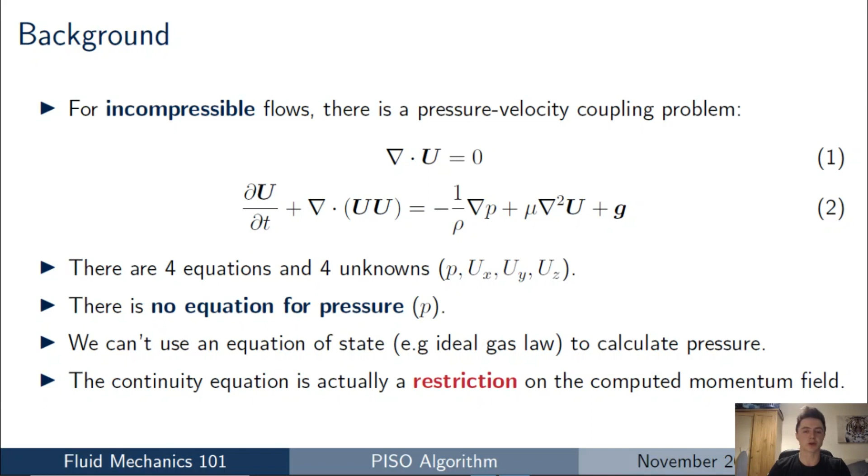And how do we perform this discretization? Well, we do that usually using the finite volume method, and I've got other videos on this channel detailing the finite volume method, or if you want to see things in more detail, you can look at the various courses that I have available, and that will show you how to get that matrix of coefficients M. But generally, when we're thinking of pressure velocity coupling problems, we want to be thinking of things in matrix form, so we've got Mu is equal to minus the pressure gradient there on the right hand side. And so that's a reminder of what those terms mean.

Now, it's also worth remembering that the matrix of coefficients M—all of those coefficients are known, and we calculate those and know what they are, depending on what sort of discretization schemes we use for the convection term, the diffusion term, and so on.

And I've got other videos on this channel about how you discretize the individual terms. But for now, we want to be confident that we're just starting with that general matrix equation, MU is equal to minus the pressure gradient there.

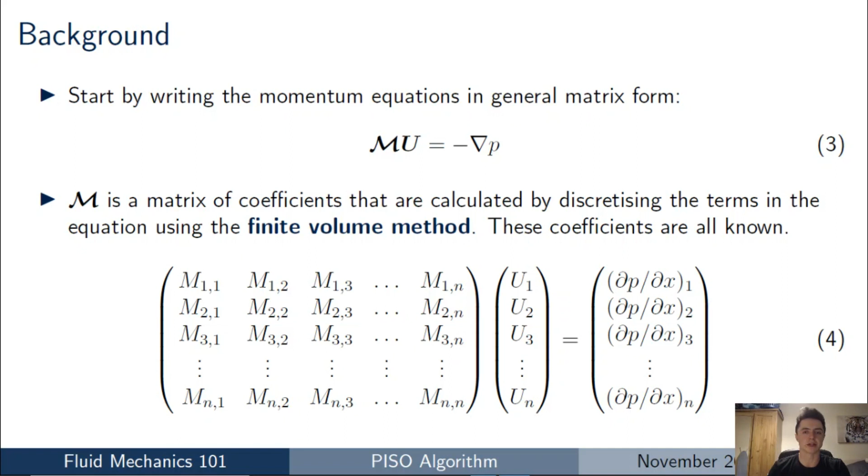Now, at this stage in our pressure velocity coupling problem, what we could do is take the pressure and the pressure gradient from the previous iteration or the initial condition, and then we could just solve that equation directly. So we know the matrix of coefficients m, and we know the source term on the right hand side from our initial guess or previous iteration, and that would allow us to compute a velocity vector, or the momentum field u.

Now, because this is the pressure velocity coupling problem, it's worth noticing that when we solve that momentum equation, the velocity vector u does not satisfy the continuity equation. As a reminder, the vector u, v and w has to satisfy the continuity equation for it to be a valid solution. So at this stage, when we solve the momentum equation, this is often called a momentum predictor in the algorithm. And it's a prediction because we've got a guess for the velocity field, and it doesn't currently satisfy the continuity equation.

Now, a small side note for those of you who use OpenFOAM and like to dive in and actually look at the equations in the source code, you'll often see this momentum predictor stage written as you can see at the bottom of the slide. You're clearly solving a momentum equation, and that's equal to a source term, which is the pressure gradient on the right hand side.

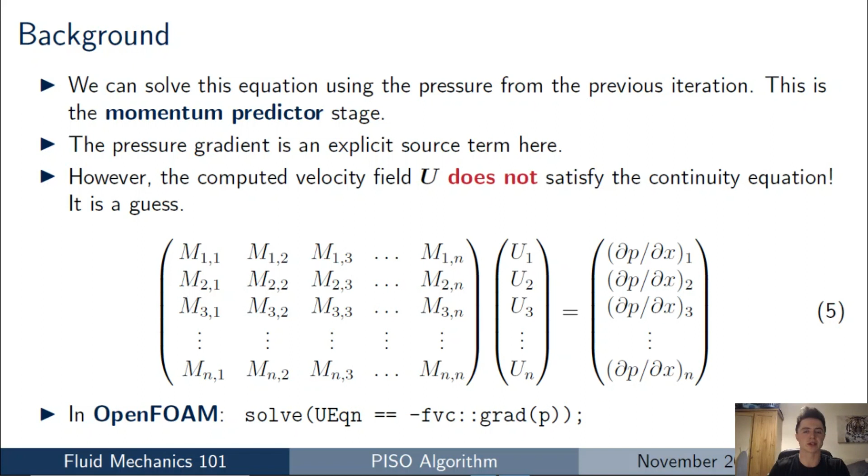Now, when we're analysing and looking at these algorithms, there are a few other extra stages which we need to think about, which will help us when we analyse the system and look at how the pressure velocity coupling algorithms are put together. And the first stage in all of these is, if we think of that matrix of coefficients m,

what we can do is extract the diagonal from that matrix. And the diagonal component of the M matrix is known, and I'm going to use the notation A, the A matrix. You can see it's just extracting those coefficients of the diagonal and using that to make a new matrix. Now, if you follow along with the various sources in the literature, you may see this written as A sub P instead of capital A, which I'm using here. I prefer to use capital A just as a reminder, this is a matrix, just like everything else. Whereas if we used AP, we could confuse that with a value.

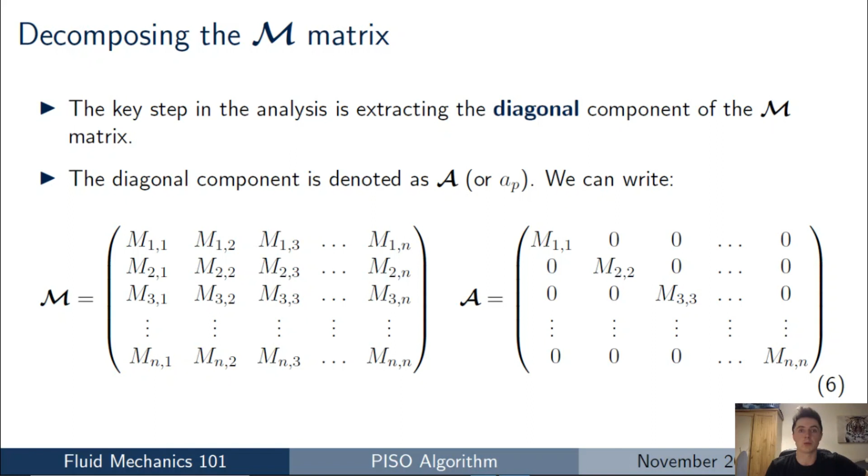So from the M matrix, we can extract the diagonal if we want. And why would we do that? What can we do with this A matrix? Well, the thing to remember is that with a diagonal matrix, it's very easy to compute the inverse of the matrix. And the inverse of a diagonal matrix is just 1 divided by each of the diagonal coefficients, which you can see in equation 7.

And for those of you who follow along the sources in the literature, you will often see this written as 1 over AP. So again, 1 over AP, it's just the same as the inverse of this A matrix, but I prefer to call it the inverse because it's more correct and it reminds us what we're actually doing. And again, if you follow along in OpenFOAM, you'll often see this 1 over AP written as you can see in an extract from the source code, which is sometimes called RUA, which means the reciprocal of the A component from the U equation.

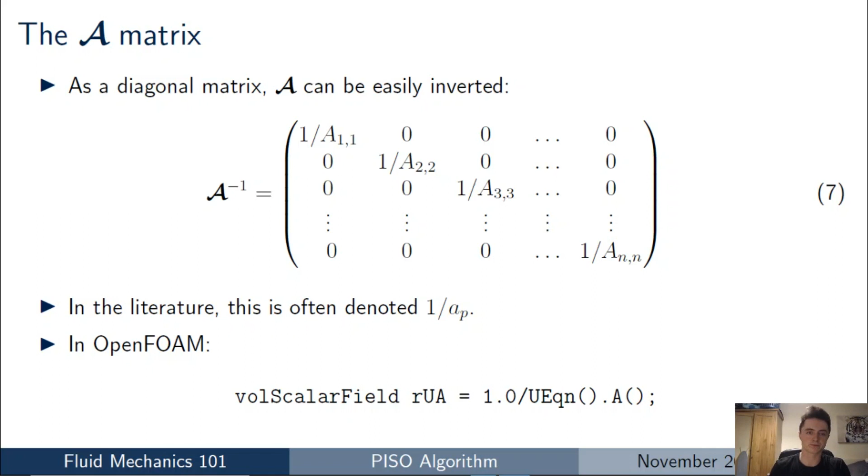So now that we've extracted the diagonal from the M matrix, we can do a bit of manipulation. And with that manipulation, we'll see another matrix called the H matrix appear, which you'll often see if you look through the sources in the literature.

So if we think back to our momentum predictor equation, which we have in equation 8, instead of mu, we're going to write that as au minus h. Now A, as a reminder, is that diagonal matrix that we extracted from the M matrix, and then the H matrix is just the residual of all the stuff that we've got left. So we extracted the diagonal, and then all the stuff that's left, we're going to bundle that together and call that the H matrix. So the reason I'm using H, it may seem random at this point. Why am I choosing H?

What does H mean? Well, H is often the notation used by OpenFOAM and sources in the literature, so I'm deliberately using H here so that you know exactly what it means.

Now there's a small tripping point here which you could easily get wrong if you're not careful: notice that we're using the decomposition in equation 9, so MU is going to be AU minus H, not the decomposition shown in equation 10. What do I mean specifically? If you took the M matrix and stripped out the diagonal, the remainder you could call H - that would be equation 10, all the off-diagonal components with zeros along the diagonal. That's specifically not what we're going to do.

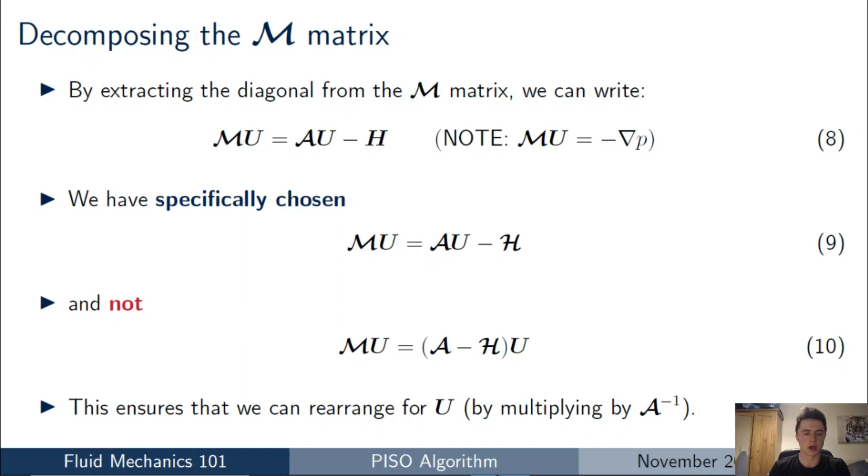So now that we've got that decomposition, equation 11, MU, we're going to replace by AU minus H, and we could just rearrange that to get things in terms of H. A reminder here that H is just the residual we're getting after performing this decomposition. And why do we care about the H matrix? Well, the H matrix allows us to calculate the source term for the pressure equation.

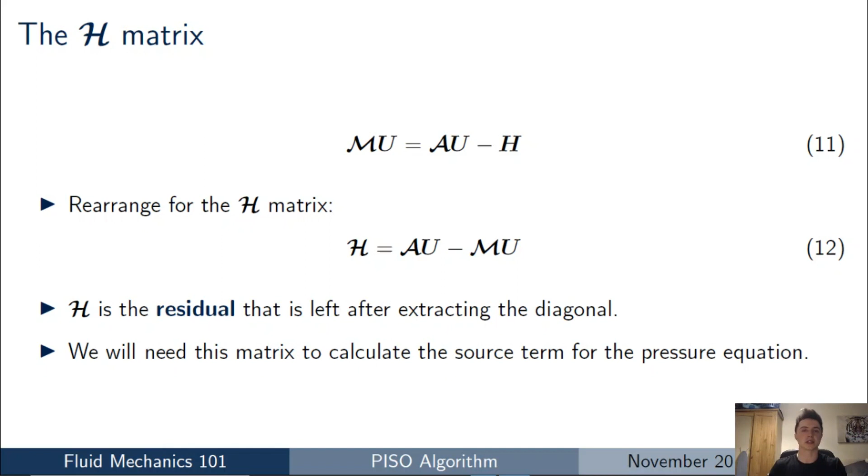So we are going to use the H matrix, don't worry. If you've seen my video for the SIMPLE algorithm, you will have seen this matrix appear before, but I just wanted to line things up for you first to say where this matrix is coming from and what it means: it's the residual that's left after we strip out those diagonal coefficients from the M matrix.

As a reminder, we've got the momentum predictor. We've solved the momentum predictor to get some kind of velocity field. What we now need to do is have a way of calculating the pressure, and the way we do that is by deriving a pressure equation.

But if we want to get an equation for pressure, we can substitute equation 14 into the continuity equation. Up until this point, the continuity equation has just been a restriction on the velocity field we compute - it would have to satisfy the continuity equation to be valid. But now we're actually going to use the continuity equation to derive a new equation for pressure that we can solve instead. So instead of having a restriction, we now have an equation that we can solve, which is much easier.

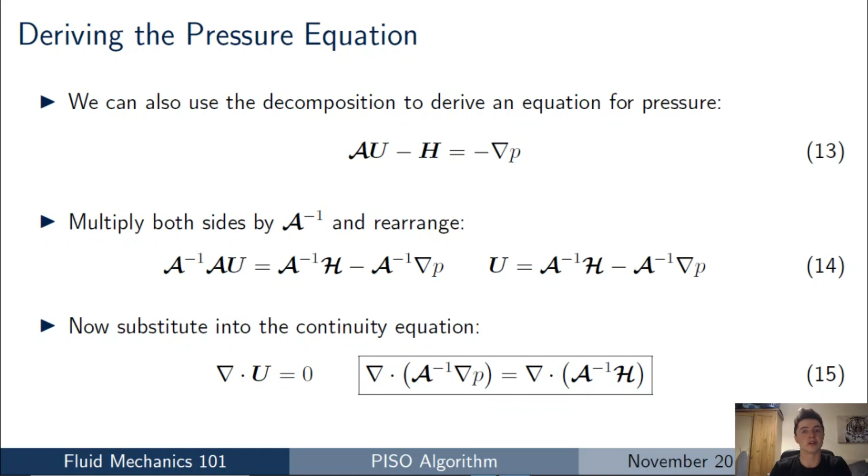So this is just a reminder, this is all background so far for setting up these algorithms. We've got a momentum predictor that we can use to calculate a velocity field, and now we've also got an equation for pressure. Using those together, we can come up with an algorithm for solving the momentum and pressure equations together, while ensuring that the velocity field satisfies the continuity equation.

Now that I've got this pressure equation, I want to highlight for those of you following along using sources in the literature or digging through OpenFOAM or other CFD code, you'll see this pressure equation sometimes written as in equation 16, with 1 over AP instead of the inverse of the A matrix. They're the same thing.

Some people use H of U instead of just H to calculate that residual matrix on the right hand side. I personally prefer to use H because with the extra U it can get confusing. In OpenFOAM you'll often see fragments scattered through the code at various places looking like this.

We've got that first expression for the inverse of the A matrix. The second expression is for the H matrix multiplied by the inverse of the A matrix, and right at the bottom you can see an expression for the Laplacian of the pressure. That's the pressure equation that we would be solving.

On the right hand side you've got a divergence term for the H by A term. So if you're looking through the source code or various sources in the literature, when you see these things recognized as A or H or Laplacian of the pressure gradient, you'll understand where they're coming from, and you can follow the derivation I've given if you want to derive it yourself.

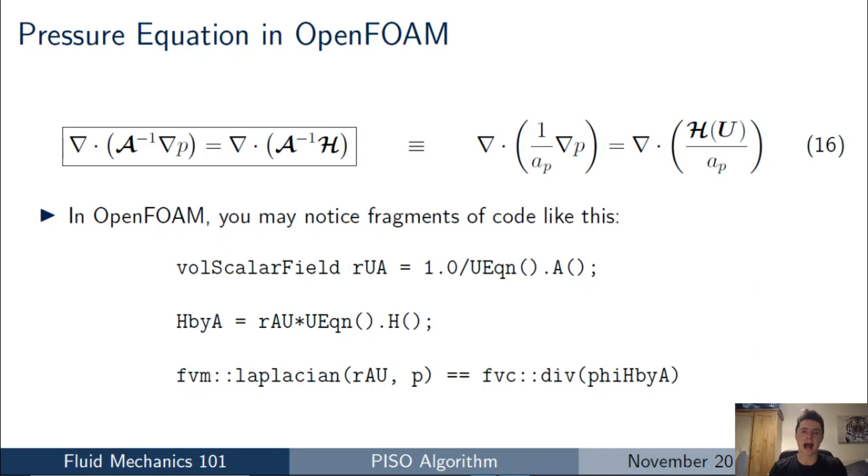But now let's actually go ahead and look at the algorithms so you can see how the SIMPLE and PISO algorithms actually solve the system together. I'm going to call these pressure velocity coupling algorithms because they're specific for incompressible flows when we have a pressure velocity coupling problem.

In the algorithms, the first thing we always do is solve the momentum predictor first, that's equation 17. We know the matrix of coefficients M, and we have an initial guess or the previous iteration of the pressure term on the right hand side, and we solve that for the velocity field. The velocity field is a guess as before, because it doesn't yet satisfy the continuity equation.

But now that we have the velocity field u as a guess, we can calculate the H matrix, that's equation 18. On the right hand side, the H matrix actually depends on the velocity field, and we've got the A matrix there, which we strip out from the M matrix. So momentum predictor first, then we jump straight into calculating the H matrix.

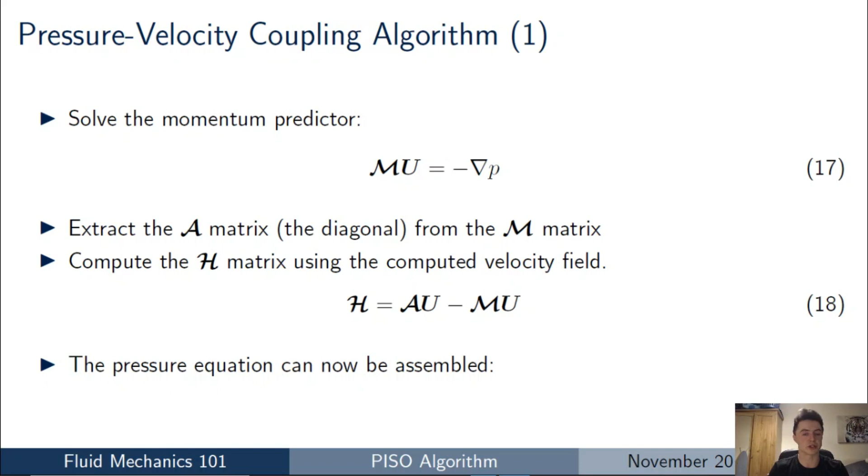The reason we calculate the H matrix is because it's a source term on the right hand side of the pressure equation. That step is sometimes missed out by some explanations you may see on the internet. Now we can solve the pressure equation, and on the right hand side you can see the H matrix, which we've just calculated, and the inverse of the A matrix, which we stripped out from the M matrix. Solving equation 19 gets us the pressure field.

Once we have the pressure field, we can use equation 20 to compute a new velocity field. The difference here is that the velocity field is calculated explicitly. We're not solving a matrix equation, we're calculating it directly from the A matrix, the H matrix, and the new pressure field we just calculated in equation 19. This is called an explicit pressure correction, and it means the velocity field we compute here will satisfy the continuity equation.

So it's, you might say, a solenoidal vector field, but it satisfies the continuity equation. And this is exactly what we want - this is the corrected velocity field at the end of the algorithm.

For some of your interest, this is why the simple algorithm is called the semi-implicit method. Semi-implicit means it's partly explicit, and the explicit part is equation 20, where you're explicitly calculating the velocity field directly from the pressure field you've just calculated.

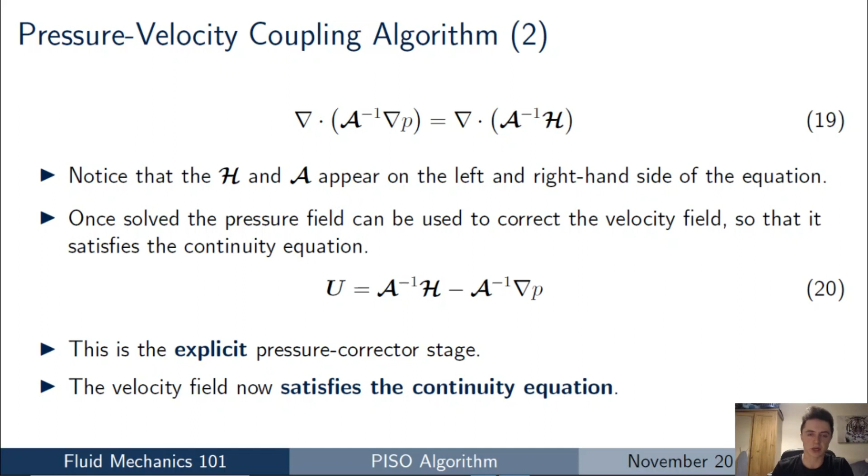However, there's a small problem here. If we think back to the pressure equation, equation 21, on the right hand side the source term has got the H matrix in there, and what we know is that the H matrix depends on the velocity field u, which you can see in equation 22.

Originally we used the momentum predictor to calculate that H matrix, but now we've corrected the velocity field, so u is different now to what it was before. And of course that means if u is different, H is different.

So the source term in the pressure equation, equation 21, has changed. That means the pressure field is no longer correct. Even though our velocity field satisfies the continuity equation, our pressure field is not correct and it needs updating.

Maybe take a few minutes to think that over, and if you write the equations out for yourself, you'll see that the pressure equation is no longer correct, and we need some way of updating this H matrix so that we can resolve the pressure equation.

This is the key point where the simple and the piso algorithms come in. This is often not explained very well on the internet and other sources, where people talk about relaxation factors and time steps and get confused. But really this is the key step.

It's how do we go back and update the pressure equation by updating that H matrix. The two algorithms are really two different methods of updating the H matrix. I'll start with the simple algorithm because it's easier, then I'll show you the piso algorithm, which is a different way of updating the H matrix and pressure equation.

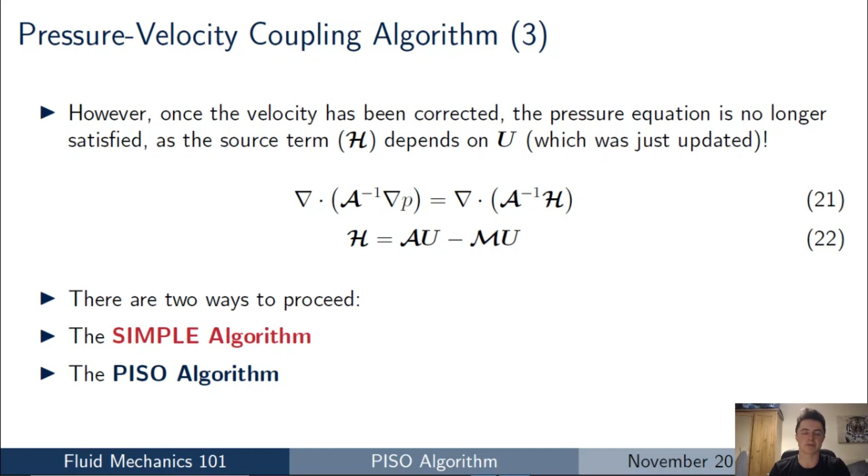So the simple algorithm is very direct, and what it says is: we need to update the H matrix, so I'll just go all the way back to the start and solve the momentum predictor again. So I just go back through the entire loop.

For those of you who might be finding that difficult to follow in your heads, like I was, I find it much easier to actually just write down the equations and look at them to see where we're updating. So a reminder of what the loop looks like for the simple algorithm.

We start with equation 23, we solve the momentum predictor. Once we have u, the velocity field, we calculate H, which is equation 24. Then we calculate the pressure field by solving the pressure equation in 25, and then we update the velocity field in equation 26.

But now what we do to correct the H matrix is go all the way back to the start of the loop, equation 23, solve the momentum predictor again, and use that to update the H matrix so that we can then solve the pressure equation again.

It's worth noting this loop is often called an outer corrector loop, because with the simple algorithm we're going all the way back to the start of the process and solving the momentum predictor again. So really it's a very direct way of doing things, and it uses quite a long loop. The Piso algorithm is slightly different, which we'll see in a minute.

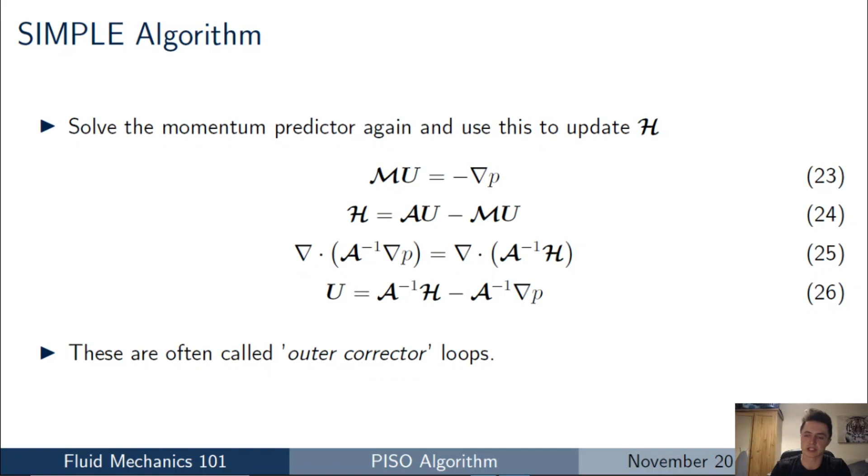Hopefully by writing those equations down, you can really see exactly where the loop is in the simple algorithm. It's worth noting so far I haven't said anything about time stepping or relaxation or convergence - this is just the stages and equations you would solve if using the simple algorithm for your pressure velocity coupling. So what about the Piso algorithm?

Well, in the Piso algorithm, what we do is solve the momentum predictor once. So we start with equation 27 and solve that once directly. But then, as before, we calculate the H matrix and use that to solve the pressure equation, equation 29.

Once the pressure equation's been solved, we correct the velocity field using equation 30. The difference between the Piso algorithm and the simple algorithm is that rather than going all the way back to the start and solving equation 27, we jump straight back to equation 28.

To compute the H matrix, we need the velocity field. Rather than use the velocity field from the momentum predictor, we're going to use the velocity field directly from the one that was just corrected in equation 30. So now we're looping over equations 28, 29, and 30, and we only solve the momentum predictor once. So this loop is a lot tighter, we're only looping over 3 equations.

This process is often called an inner loop if you look at CFD manuals and source codes. So actually, at a fundamental level, the difference between the Piso algorithm and the simple algorithm is very slight, and it's just which way we're updating the loop.

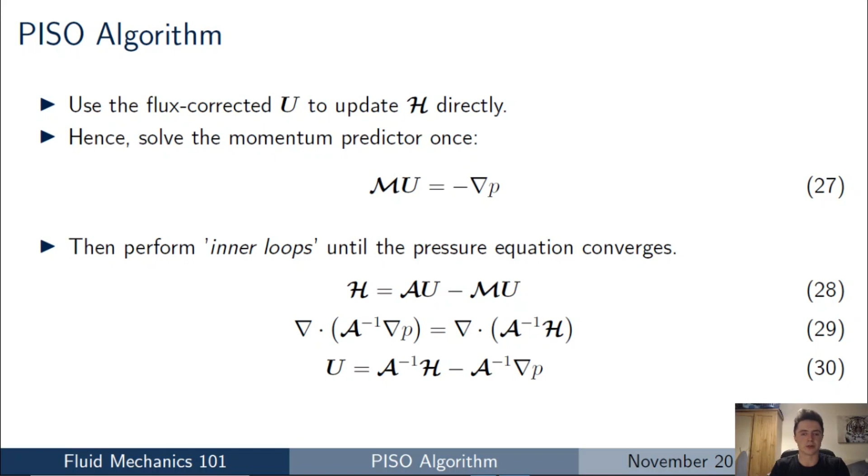Now that we've looked at the difference between the two algorithms in the order the equations are solved, I'm going to introduce some other concepts and reasons why you might choose to use a simple coupling or a Piso coupling depending on your simulation. The first place to start is to think historically about these algorithms and where they came from and what they were originally proposed for.

The simple algorithm was proposed first in the 1970s, and was originally intended for steady state flows. Originally intended doesn't necessarily mean you'd have to use it only for steady state flow, but that was its original purpose. And just a reminder, with steady state flows, we don't have a time derivative, so the du/dt expression in equation 31 does not exist for a steady state flow. What does this mean for the equations we're solving?

If we think about a transient flow with a very small time step, then on the right hand side of equation 31, up divided by delta t is going to get very big. As the time step gets very small, up over delta t gets very large. So in terms of the overall matrices we're constructing, the du/dt term gets a lot bigger as the time step gets smaller. If we think of all the terms in the equation—time derivatives, convection, diffusion, gravity, forces, and source terms—the time derivative becomes dominant, a lot larger than the other terms.

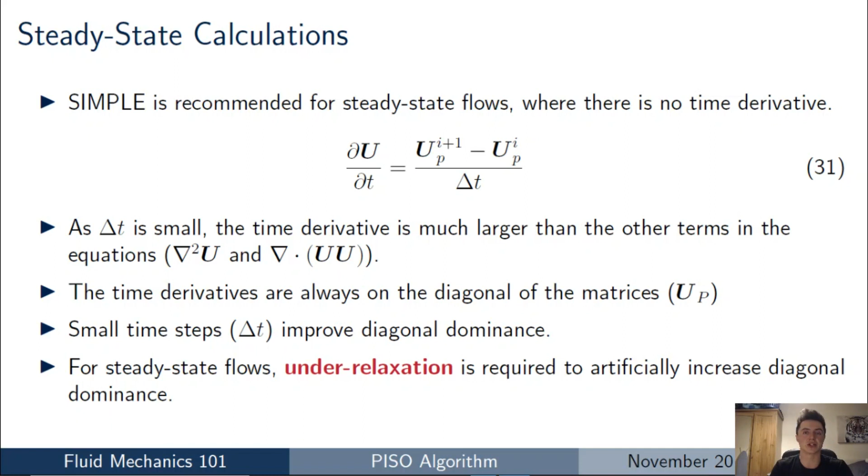It's just that transient flows take many more iterations to solve because of the time stepping, so it's a bit counterintuitive. In the simple algorithm, when it was originally proposed, under relaxation is often employed. So if you use the simple algorithm yourself, you will often see under relaxation in the equations, whereas you may not see them in a transient flow. Now this under relaxation is slightly different to a traditional under relaxation you may be used to from general algorithms.

The way I'm going to explain this is by starting with equation 32. You can see you've got APUP, that's the diagonal terms in the matrix, and then you've got the off diagonal terms in the summation, ANUN, equal to a right hand side matrix. So equation 32 is basically just a general form of a linear algebra matrix equation.

When we apply under relaxation to the momentum equations, we add in two additional terms, shown in red in equation 33. We've got 1 minus alpha over alpha multiplied by APUP. So the APUP sits on the diagonal of the matrix, and alpha is the under relaxation factor, which is always between 0 and 1.

We've added that term to both the left and right hand sides. On the left hand side we've got the current value, but on the right hand side we've got the old value of the velocity field. The reason we can add this to both sides is that when the equations are converged, u old will equal u new, and these red terms will cancel out and disappear. But until we reach that point, those terms are different, and they actually help us converge the matrices.

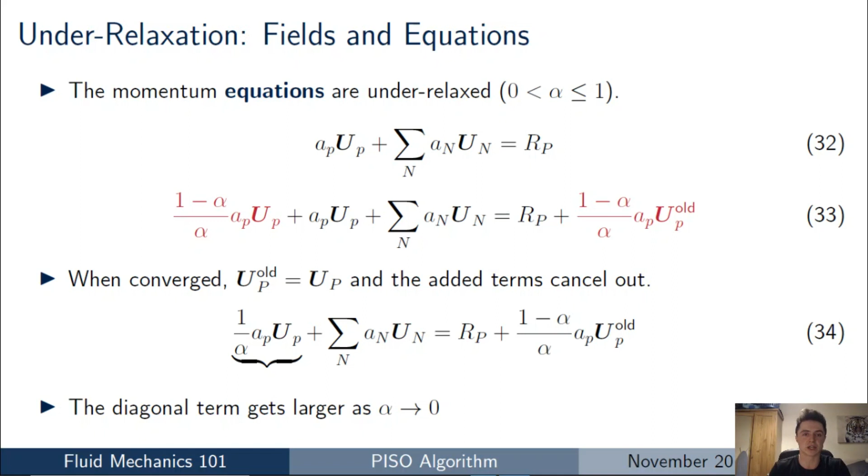It's worth comparing this with the traditional way to do under relaxation, where if we'd calculated a value in an algorithm, we could update it using something like equation 35, adding on a fraction of the new value to the old value when updating the field. This form of under relaxing fields—pressure, turbulent kinetic energy, temperature—is often applied to those, but the matrices themselves are under relaxed in the momentum equations.

To be honest, I'm not too clear why that process happens—it's not very clear from reading through the literature. However, be aware that there are two different types of relaxation: one applied to the momentum equations, increasing the strength of the diagonal, and direct relaxation of the fields—pressure, turbulent kinetic energy, and temperature.

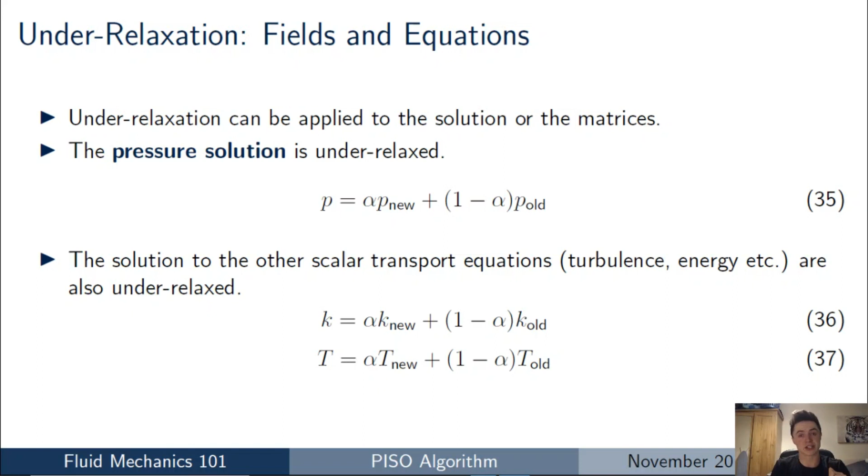This under relaxation is typically applied in the simple algorithm. However, the PISO algorithm is different. The PISO algorithm was introduced slightly later than the simple algorithm, historically around 1986, and was originally intended for unsteady, incompressible flows. For unsteady flows we have a time derivative, so that diagonal in the M matrix is a lot larger and the system is more diagonally dominant. So we don't actually need under relaxation, on the condition that our time step is very small. If we have a very small time step and our Courant number is less than 1, we can get away without any under relaxation at all.

And this is how the PISO algorithm was originally proposed. If you look through any source code on PISO algorithm and PISO loops, you'll often not find any under-relaxation at all. That's because it's assumed that the Courant number is very small and we're using very small time steps. Now, why was the PISO algorithm introduced, and what was it for?

Why couldn't we just use the simple algorithm? We could take our first time step and fully converge that time step using the simple algorithm, then just step on to the next time step. Well, if we think about it, with the simple algorithm we often need a lot of iterations to fully converge when we apply it. Common practice tends to be we need a few thousand iterations, often 5,000, to fully converge a steady state flow with the simple algorithm.

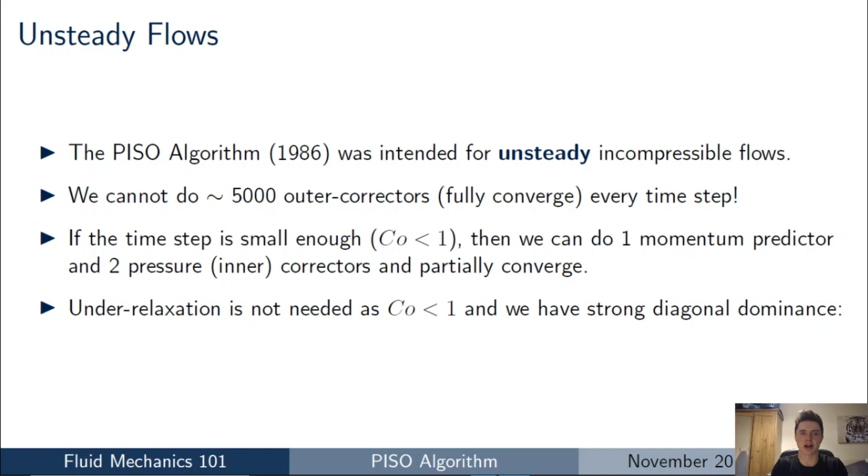Now, there are of course more modern pressure-velocity coupling algorithms which you may have heard of, and some of these will tend to try and do even better than the simple and PISO algorithms. One such example would be the PIMPLE algorithm, which you may have heard of in OpenFOAM, where you can actually use larger time steps and then converge them partially, maybe doing 15 or 20 iterations within a time step, but allowing you to extend the Courant number greater than 1. But I'm not really going to look at those algorithms here. I just wanted to focus on the simple and PISO algorithms.

Now, one thing I want to finally touch on before finishing are the non-orthogonal correctors, because if you're looking through the source code, you may see these correctors as well, and it's useful to know what the difference is between an inner corrector, an outer corrector, and a non-orthogonal corrector.

So when understanding non-orthogonal correctors, the first thing to do is to look at the pressure equation, which you can see in equation 38. Notice that the pressure equation is essentially a Laplacian, or more technically a Poisson type equation, where you've got nabla squared times the pressure equal to some source term on the right hand side. And of course, if the mesh is not orthogonal, this equation needs to be solved several times in a row, updating the source term each time to account for the non-orthogonality.

For those of you who haven't come across this before, it's worth going and looking at my video on non-orthogonal correctors to understand why this is needed for meshes that aren't perfect squares. As soon as the mesh is not perfect squares, you have to include non-orthogonal correctors, or at least consider them if you're going to get an accurate answer.

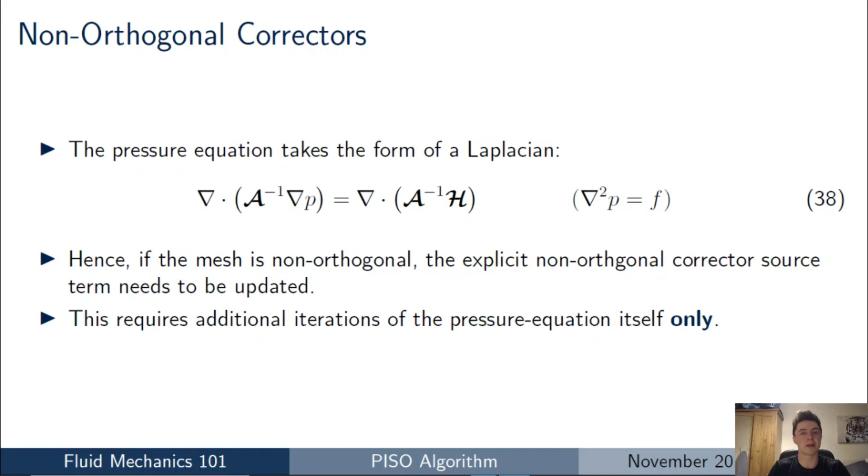So how do these non-orthogonal correctors appear in the simple or PISO algorithm when we're thinking about it? Well, what we do is iterate the pressure equation directly in a row with the number of non-orthogonal correctors we want to use. Now, at the moment this might be a bit overwhelming for you. You might think there are a lot of equations going on and you can't quite remember which equation comes where and how many times you need to loop it.

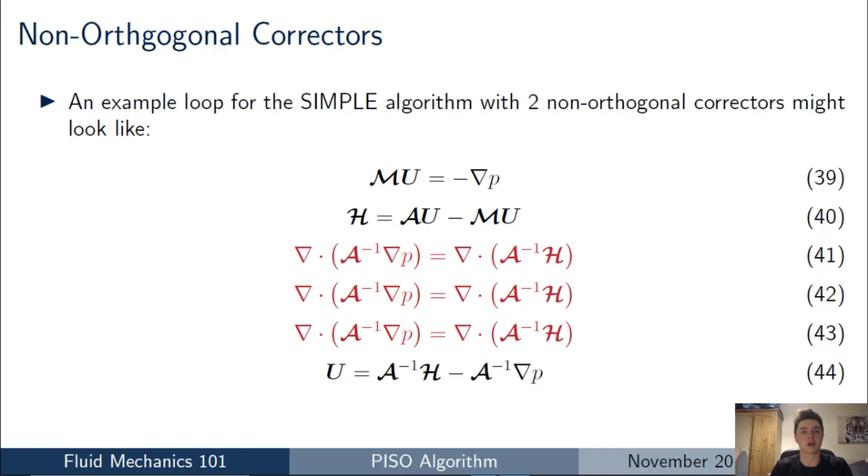So hopefully, just through those last two examples, it's a bit easier for you to follow which equation I'm solving in what order, and what's the difference between the PISO and SIMPLE loops in the process we use to solve them.

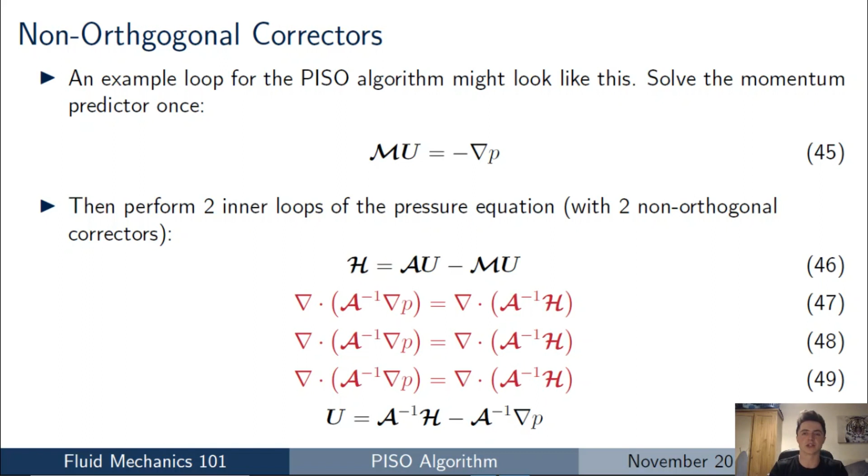So just wrapping up with a summary of what we talked about here, and a few reminder points for you. All pressure-velocity coupling algorithms, whether that's PISO, SIMPLE, or another one you may see in the literature, will solve a momentum predictor first. So we're solving MU equals minus the pressure gradient. All of the algorithms will solve that.

Then we'll move on to solve a Poisson equation for pressure and use that solution to update the velocity field so it satisfies the continuity restriction. Now at this point, we need to update the source term in the pressure equation and solve it again. The difference between the SIMPLE and PISO algorithms comes into how we update the source term, that H matrix. We either do that by looping all the way back to the start and solving the momentum predictor again, or by going directly back and using the velocity field that was just corrected to satisfy the continuity equation.

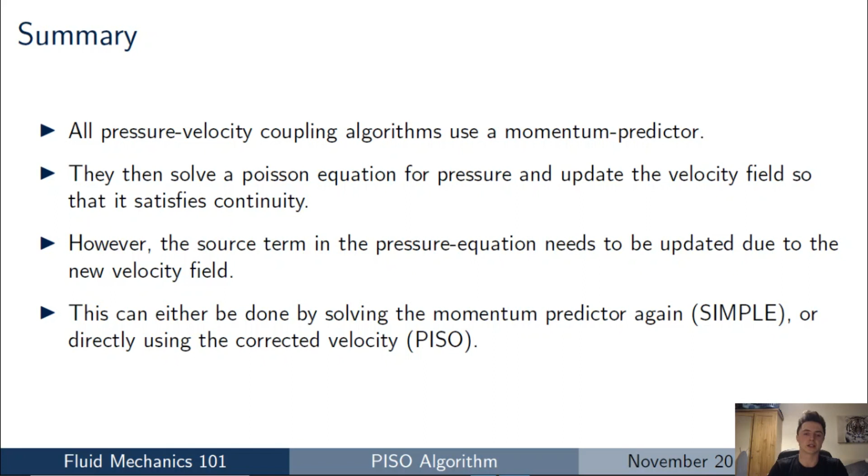So there it is, that's the end of the video. I hope you guys enjoyed that and found it as useful as I did going through it. It's really useful to actually finally see what the difference is in the loops between the two algorithms.